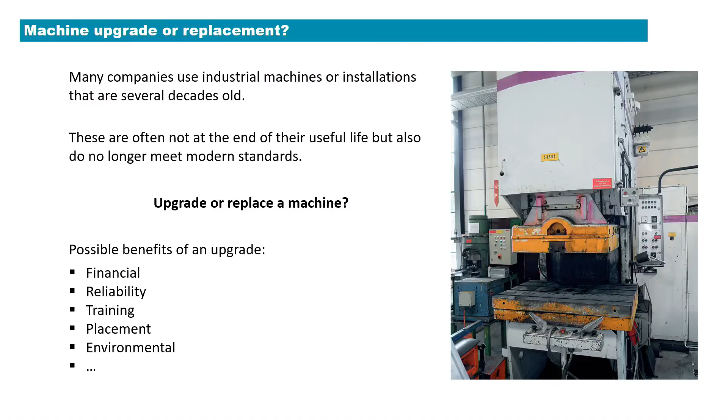Or placement. Sometimes a machine or system is deeply integrated in a building, then replacing is a big challenge. And finally, of course, environmental aspects could also be a reason to upgrade a machine.

But if we look at machine upgrading, there are still a few big challenges. First of all, what is the business case? That's the most important question, and also the most challenging question. How do you determine the costs and how do you quantify the benefits or the return that you obtain?

A second challenge is what to upgrade. As we can see here at the exhibition, there are a lot of providers of technical solutions or technology. Do you upgrade the electrical part, mechanical part, or do you want to do both together?

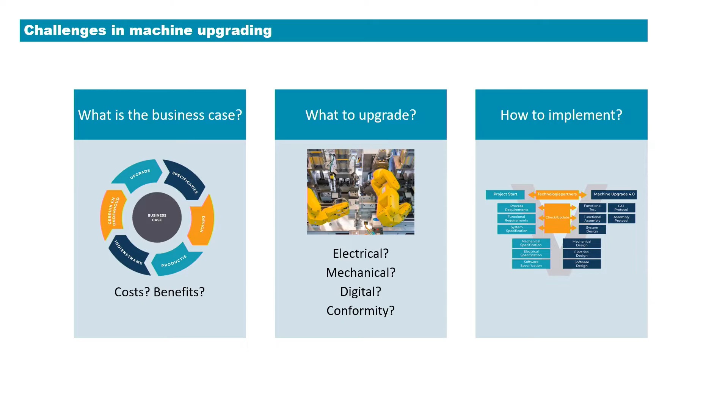It's a big challenge. The last challenge: how do you implement it? How do you connect the old with the new? But also, more from a project point of view, how do you ensure that the current production, for example, is only barely affected? Those are all challenges that many people are struggling with.

If we look at the types of transformations, I see 4 types of transformations. First of all, we have the electrical transformation, where you could think of upgrading a control unit, upgrading cabling, or transferring towards field bus communication. That's the first set of transformations.

A second transformation is mechanical transformation, where you can think of upgrading worn parts, or even upgrading the actuators.

A third transformation is the digital transformation. That's the intersection where data, combined with connectivity and with data analytics - for example, machine learning, deep learning - comes together, mainly with the purpose to increase efficiency and improve the operation of the machine.

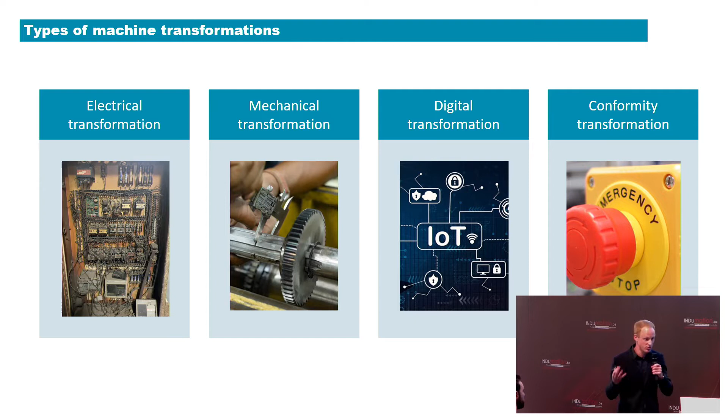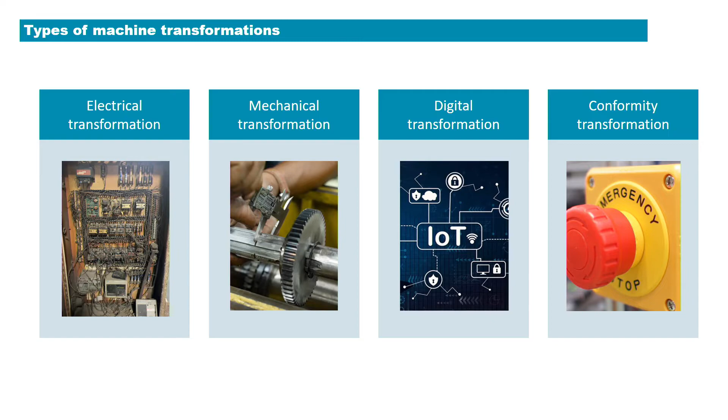And finally, the last transformation is a conformity transformation. So how do you ensure that you meet current state standards in terms of machine safety? It's important to consider, if you make adjustments to your machine, who will be finally responsible for these adjustments?

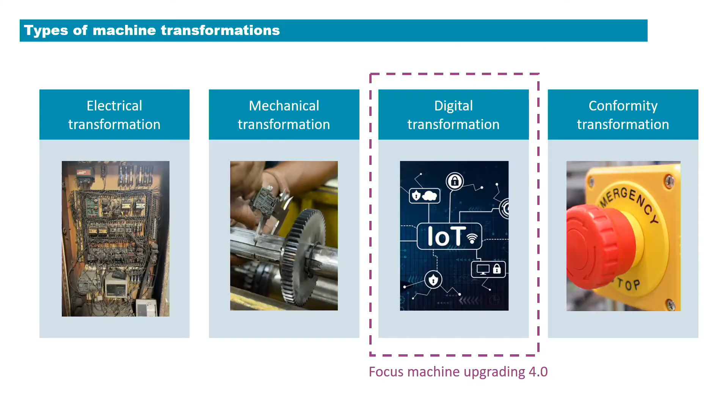So in the remainder of this talk, I will mainly talk about the digital transformation, and that's when I talk about machine upgrading 4.0. So the digital transformation process consists of different steps.

It starts with sensors that need to be able to measure the right properties. Then connectivity - you need to be able to access the data that is available at different locations, often. But then we come to a part that is typical for Industry 4.0: what about the visualization that gives you insight into what is happening? The understanding - why are the changes happening that you see? The prediction - what does it mean in future, or when can I expect that the change will happen?

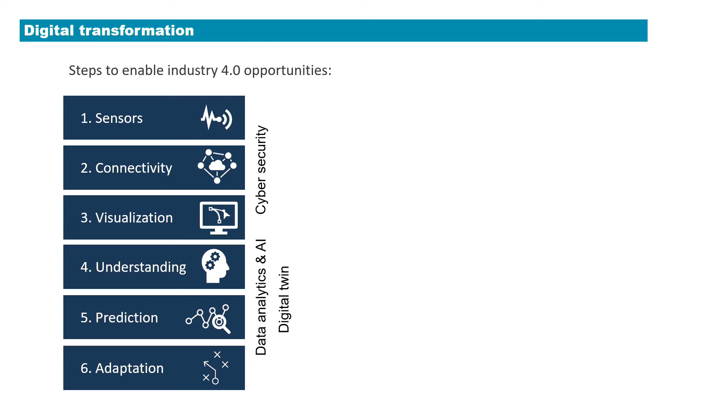And ultimately, adaptation, meaning how can I make an automated smart decision, keeping in mind that certain things will change around my machine. Key driving technologies behind this are data analytics and AI, and of course, digital twins. These are topics where we within Flanders Make are actively working on.

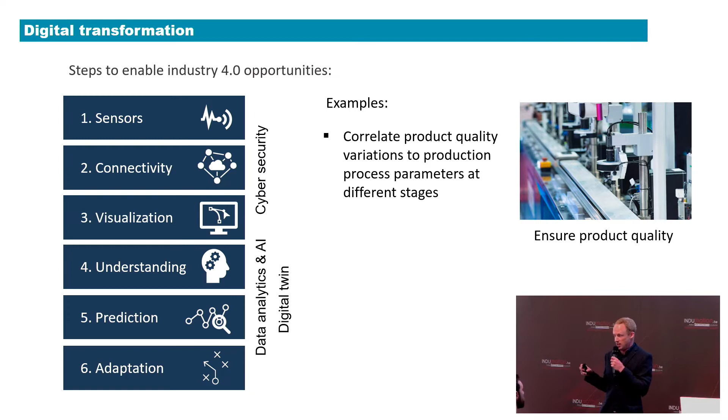To give you two examples, first of all, let's say you want to make a digital transformation to be able to correlate product quality variations to process parameter variations within different process steps. What is important in that case? That you have the right connectivity, that you're able to access the data that is distributed in different production steps of your production line, and that you can actually explore this data.

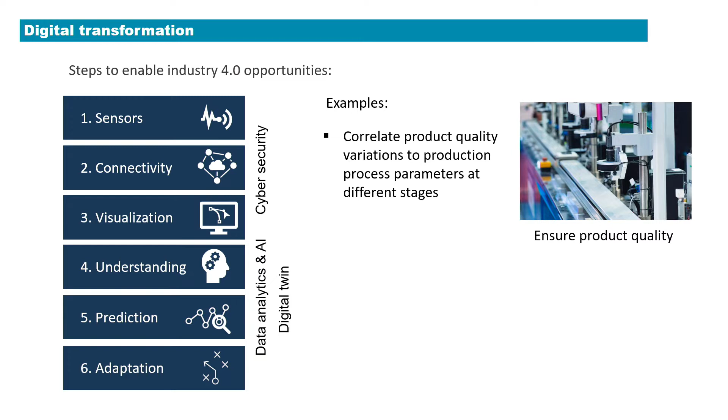A second example, if you want to add condition monitoring capabilities to your system to enable predictive maintenance, what is important in that case is, first of all, that you have the right sensors, but also that you have the right methods and tools to do prediction on when your machine or component will potentially fail.

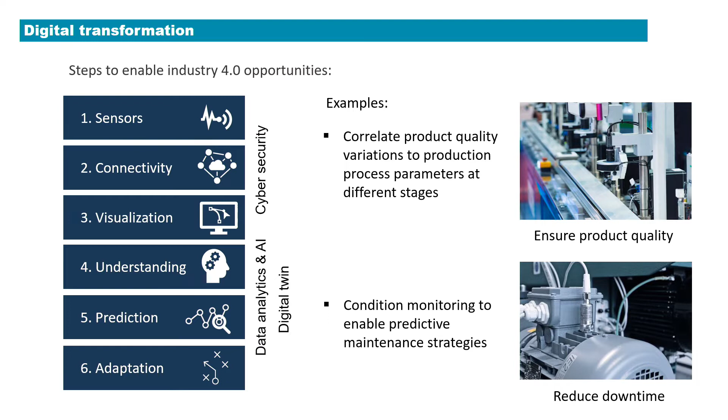Well, how do we bring this all to practice? To show that, I will introduce you to a demonstration case that we've worked on within Flanders Make. It's called a living lab, and it's focused on an industrial compressed air network in our facilities in Lommel, which is in the north of Belgium.

Within Flanders Make, this compressed air network was installed about 20 years ago, and we use it to supply compressed air to all our facilities. We have different test labs, from simple test labs to more advanced test labs where we can test full vehicles exposed to vibrations, UV exposure, and also temperature and humidity.

The compressed air system here is used to, for example, regulate the humidity in the climate chambers. But it's not only that, we also use it for several other equipments throughout our facilities.

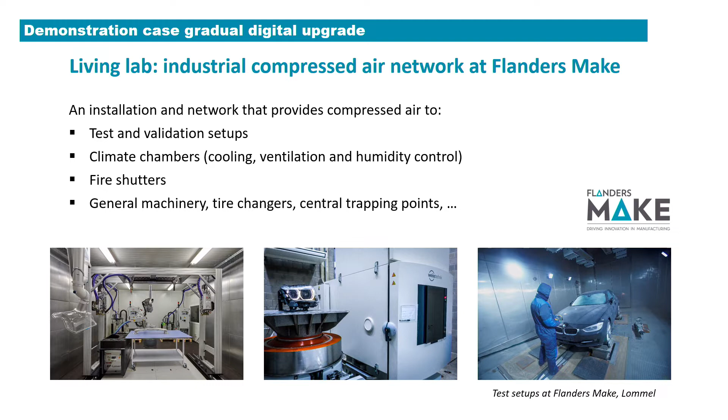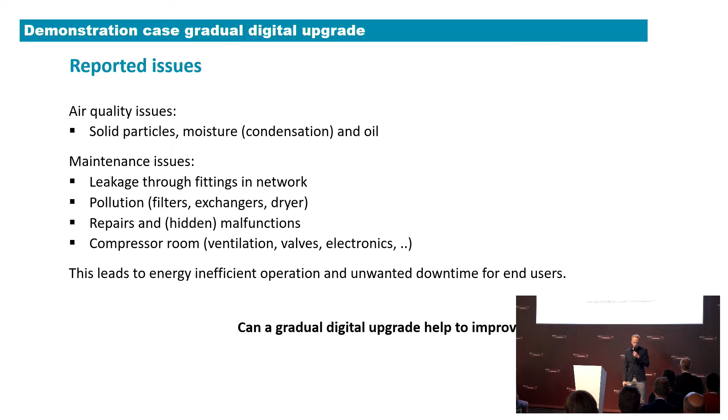Over the years, we've seen several issues have been reported. First of all, we observed quality issues in terms of the air. We saw particles, oil particles in the air, but also maintenance issues, for example, leakage in the network, pollution, and also several other repairs. So this was for us an indication that, hey, potentially there's here an opportunity to further improve the operation of this system. So the question that we asked ourselves was, can a gradual digital upgrade help us to improve the operation of this compressed air network?

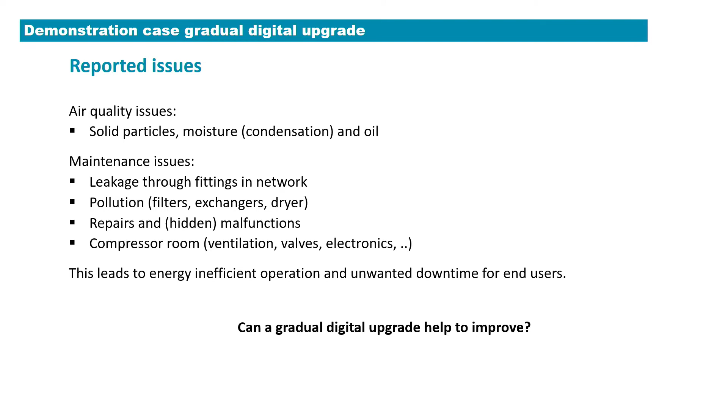And the starting point for this analysis is basically a cost-benefit analysis. You can do this in different ways. There are different tools to do this. In a simple case, it can come down to just a return on investment analysis. If you want to do it in a more advanced way, you easily go to a life cycle costing or a total cost of ownership analysis.

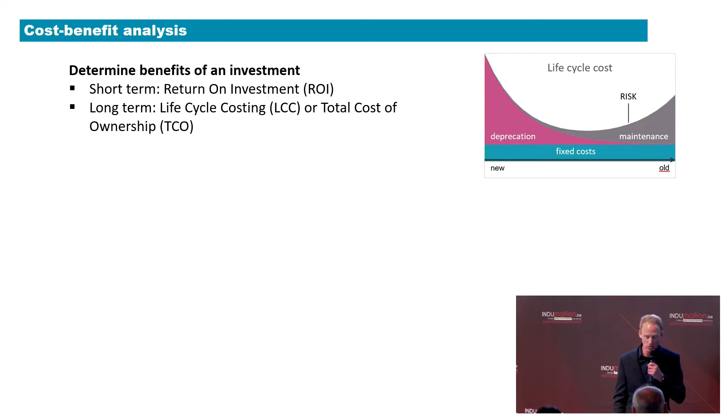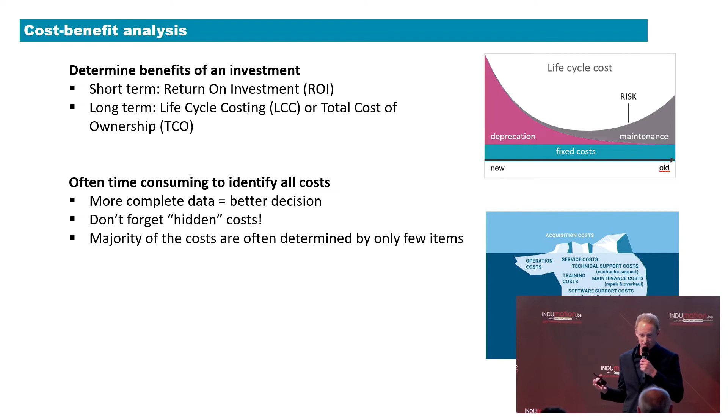What is the key issue there is, of course, it takes time. The better the data you have, the better analysis you can make, the better decision you can take. But often, having information about the cost of such an installation that was installed 20 years ago, you don't know. And that's not the only thing. It's also about the hidden costs.

What about the project management? What about the documentation that you still need to make? So they're all cost items that you need to take into account to have a full view on the cost that you're going to invest. Luckily, the majority of the costs are often determined by a few key items. That's not the only thing.

So secondly, to be able to make an accurate cost-benefit analysis, it requires a commitment. Often, knowledge is stored somewhere in the brains of people that have worked with the system. Maybe they were involved in the purchase or in the maintenance action. So it requires often involvement of many people throughout different layers of an organization to have an accurate estimate of the cost. Especially the first time, knowing who was involved is something often not that straightforward.

So what would it mean for our case? We identified 3 main driving cost items. First of all, the purchase cost, which was quite straightforward. We could look back to our original invoices, so that was easy.

For the maintenance cost, it was already a bit more difficult. We had to look in old logbooks, but that was not the only thing. We also had to talk to our facility manager, who was involved in the different inspections, but also did regular inspections himself. And that is also time that you need to take into account.

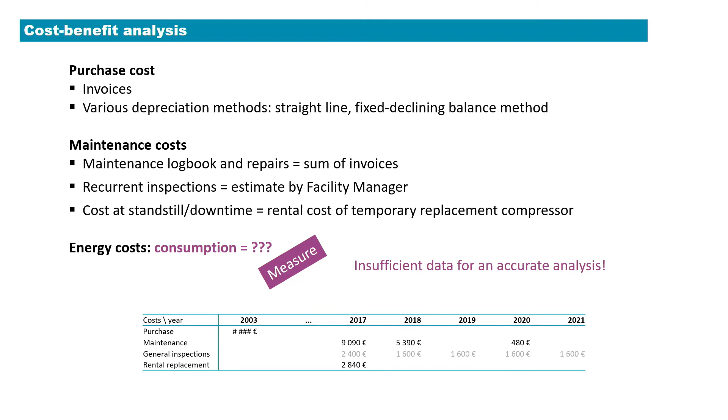The big challenge, however, was to get an estimate of the energy consumption. The compressor was just running there and just pressurizing the pressure tank. We didn't know exactly. So basically, we had insufficient data to come to an accurate estimate of the total costs, and so also of the final benefits.

So how did we estimate the cost involved in this machine? First of all, we had the expertise, talking to the facility manager. We had historical data, but the big unknown was the operational data. We didn't know how often the compressor was switching on and off. But that's a crucial element to be able to make the right decision in the end.

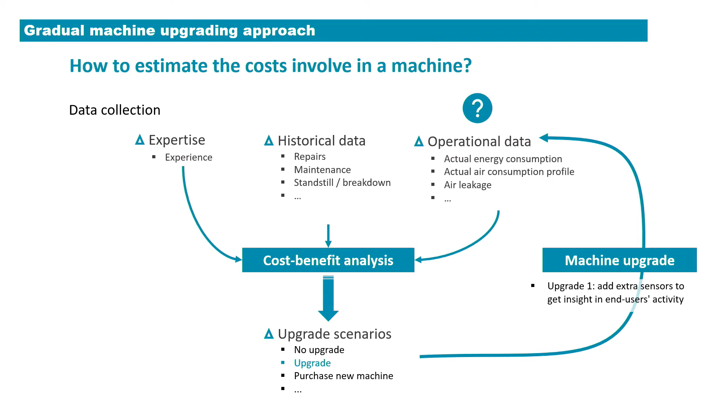So what we did in the first exercise, we made the first iteration of the upgrade. We basically wanted to get a better understanding of the usage of the compressed air by the end users. So we basically wanted to install sensors throughout the network to get an understanding of the usage.

And we just started logging data, basically. This data was all connected to a software framework where we pushed the data through an MQTT broker to an influx database where we stored the data.

Then the data was used in different services, and it was all managed by a so-called Node-RED software layer, which is a low-code programming environment. It allows you to easily connect different data sources and to set, for example, thresholds.

Then we pushed this data also to a dashboard where we could visualize and see the statistics from all the different end users in our facilities over the last days and also over the last months.

For example, if you look here to the consumption, we saw that we had a rather high idle consumption, and every now and then we saw a significant increase in the consumption, and that was mainly due to the operation of the climate chambers.

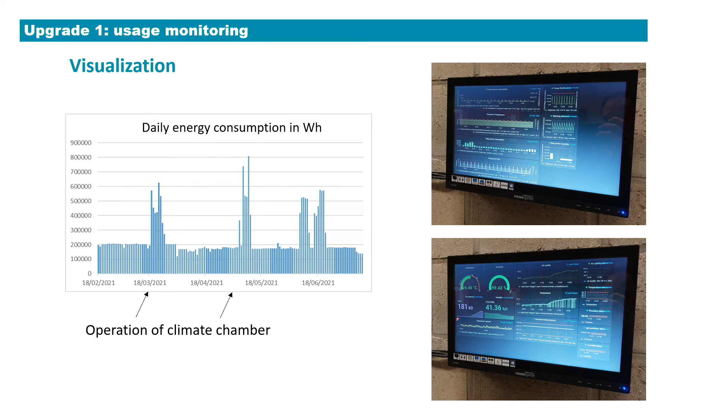So what did it teach us? Well, first of all, it taught us that a big part of the costs were associated to the energy consumption, almost about 70%. But that was not the only thing.

Secondly, what we observed was that we had a rather high idle consumption. So almost the idle consumption daily was about 30 euros a day, so 1,000 euros a month. This was mainly due to leakages somewhere hidden in the network.

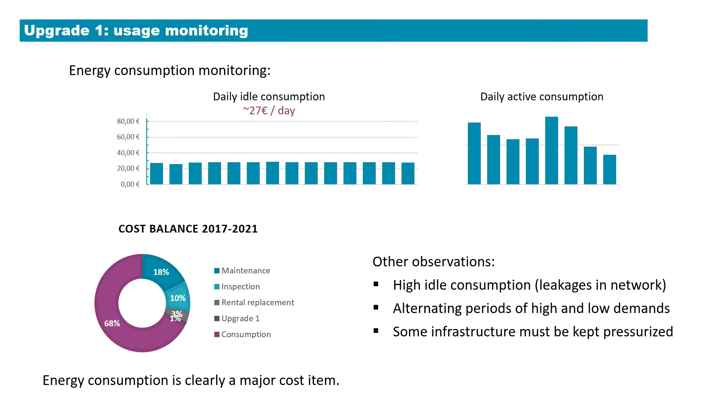Secondly, we saw that we had clearly alternating periods where we needed a lot of compressed air and periods where we only needed a limited amount of compressed air. So alternating periods of high demand and low demand. We couldn't just switch off the compressor in the low demand periods because there was always infrastructure that needed to be kept pressurized throughout the year.

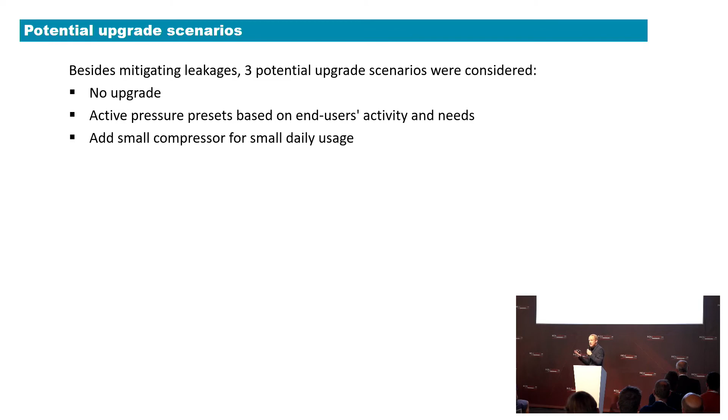But this was actually the starting point to think about what we could do in a second iteration of the upgrade. There, besides mitigating all the leakages in the network, we looked at and compared 3 different upgrade scenarios. First of all, what would happen if we just leave it as it is, no upgrade?

What would happen if we would actively change the pressure presets of the compressor from a high level to a low level, depending on the demands and needs from the users? Or thirdly, what if we would add a small compressor to just serve the small daily consumption that we sometimes see?

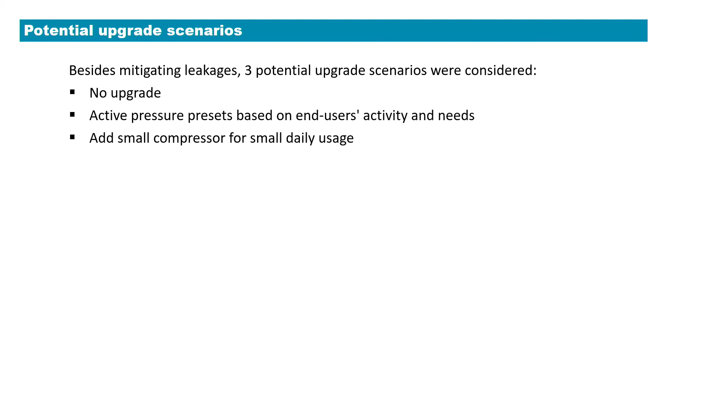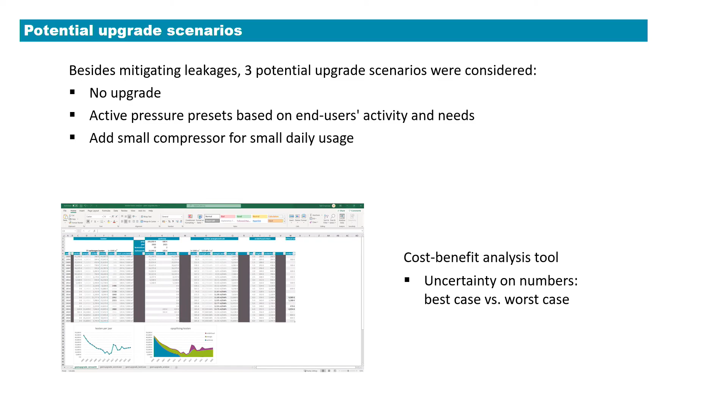So what we did, we compared these three scenarios. We made a cost-benefit analysis tool, and we evaluated those up to 2025. Important to notice is that there's a large uncertainty on the costs, as I already mentioned. So we didn't only keep one value into account, but we also looked at the worst case and the best case.

So we made a decision to go for this second scenario, to see what we could achieve by changing the pressure presets, depending on the usage of the end users.

So basically, it comes down to a second iteration of our upgrade. In the first iteration, we added additional sensors that allowed us to get a better insight into the operational usage. That allowed us to make a more accurate cost-benefit analysis, and that allowed us to make a better decision on what upgrade is the most appropriate in this case.

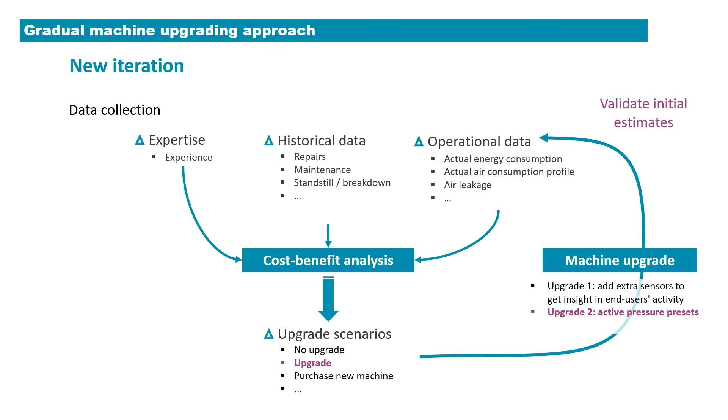For the second upgrade, the initial situation was that the compressor was always running in its high pressure preset. We thought that we could lower that, in particular in periods when there is no clear demand or the demand is much lower. It would reduce the consumption because you have lower leakage losses.

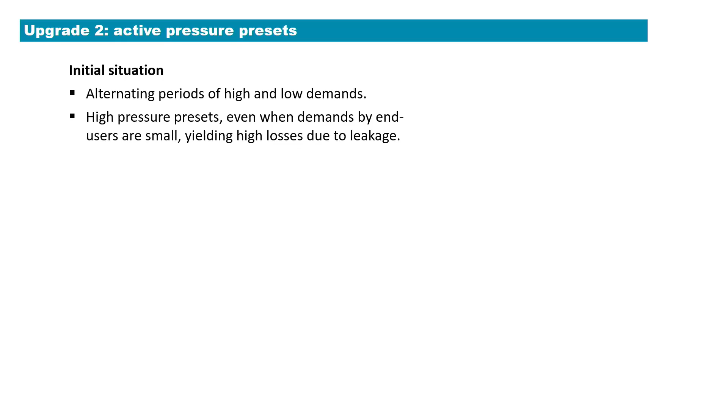So we changed the pressure presets from 8.0-8.3 bars to 6.5-7.5 bars by externally interfacing with the compressor. We could use an external interface to basically activate different presets.

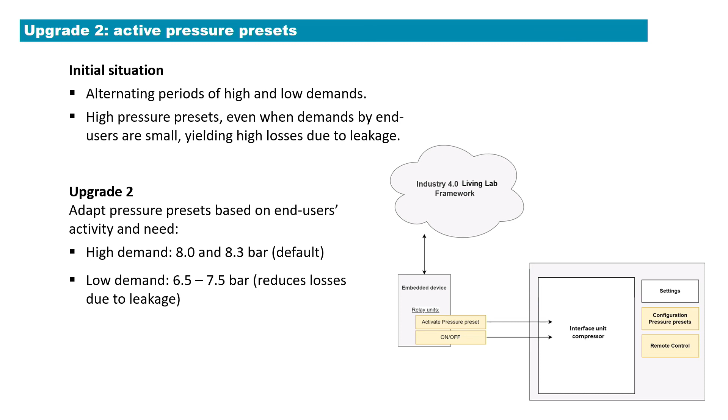By doing that, we evaluated the pressure preset over the last year, between April 2021 and 2022. And it showed us that in almost 83% of the time, we could switch to a low pressure preset, which would save us energy in the end.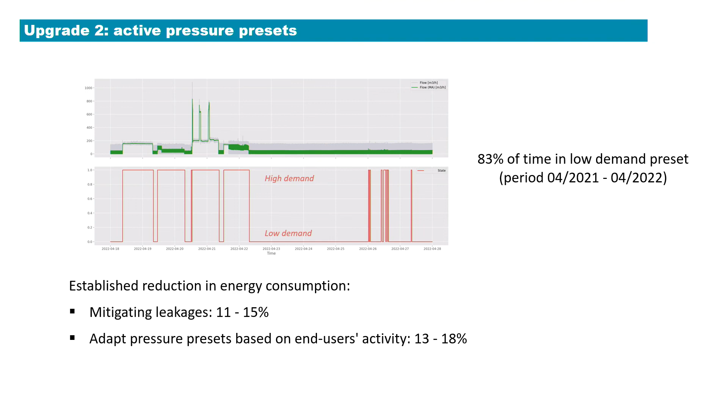So what was the final reduction in energy that we obtained? Well, mitigating leakages is quite efficient—that's obvious. Secondly, by actively setting the pressure presets, we could achieve another 13 to 18%, depending on the consumption of the end users.

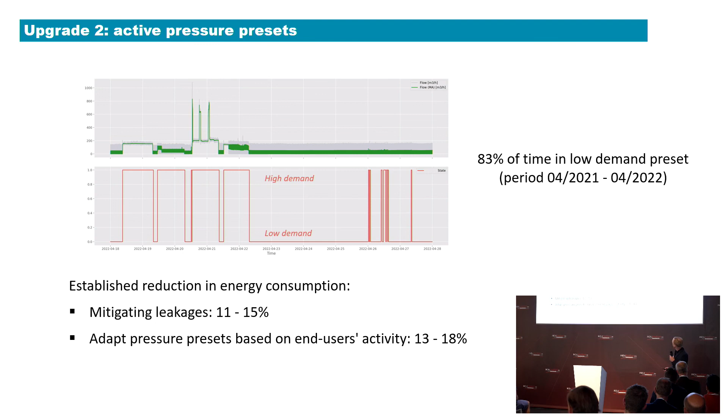Coming to the end of my talk, some key takeaways. First of all, defining the best upgrade scenario starts with a cost-benefit analysis. That's maybe rather obvious, but the difficult thing is there's a large uncertainty on these numbers, and how do you get good estimates?

That requires involvement of many people in different layers of the organization. So it's more a process rather than a one-time activity or exercise that you do. Secondly, don't forget the hidden costs.

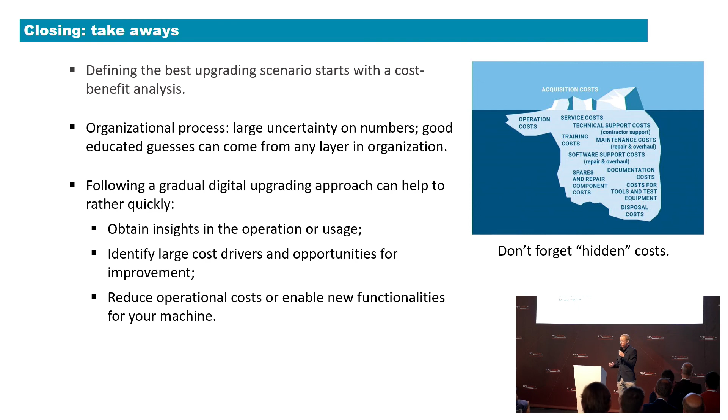Then the final point: what I showed here is that following a gradual digital upgrade strategy could allow you to rather quickly get insights into the operation and usage of your machine. It could identify large cost drivers and show you what opportunities for improvement you have. And this ultimately could lead to a reduction in operational costs or potentially enable new functionalities in your machine.

Well, in the end, what I talked about now is mainly digital transformation. I didn't talk about electrical, mechanical, and conformity transformations.